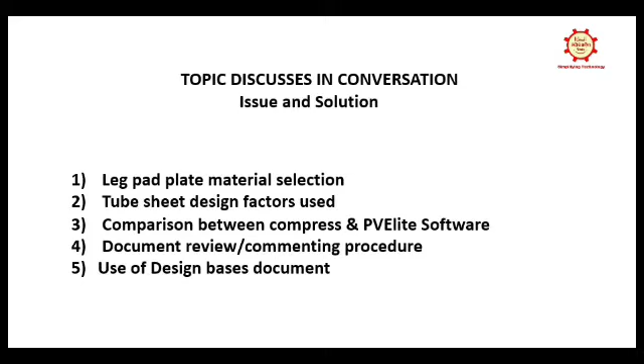Not particularly. Okay, you just came to maybe some other points in that one. You can join. Yeah, sure. I think last time you had some queries, no?

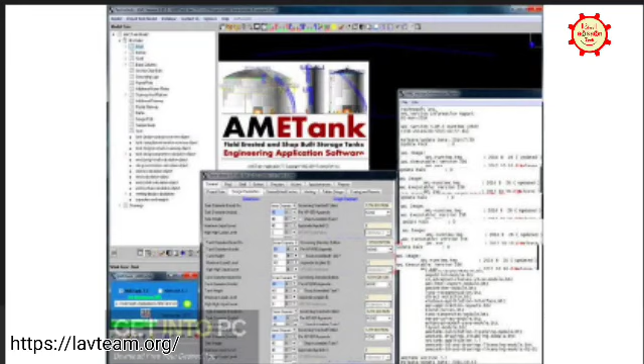Yesterday, one of the persons in the group asked about blast load. I think we were speaking about AMETank and a few other things. Actually, he asked something else yesterday, it's not blast load, they are asking about PVElite, some calculation where on the leg support.

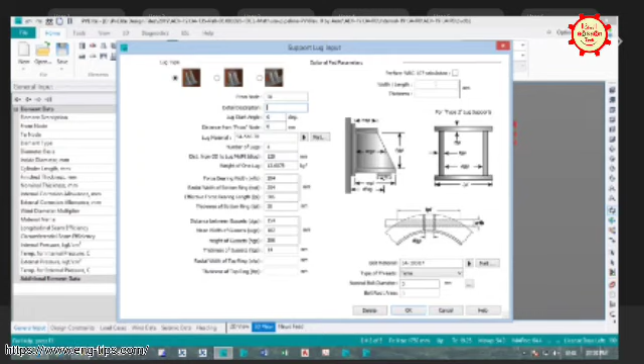I remember, material they want to specify, pad material, and that pad material there is no option in PVElite. So for that one they are asking how to address to AI inspector. So I just suggested to add one starting cover where you can specify what inputs are used, like material, and attach that with your report.

True, yeah, that will solve your issue. Did you face any such type, pad material different and vessel material different, like that? Any issues did you face? Yes.

Say in case of duplex, no need to have duplex pad. It is sufficient to have SS pads. We have done also, but it is up to the fabricator. Whatever seems less costly or more cost effective for them, we can do that way.

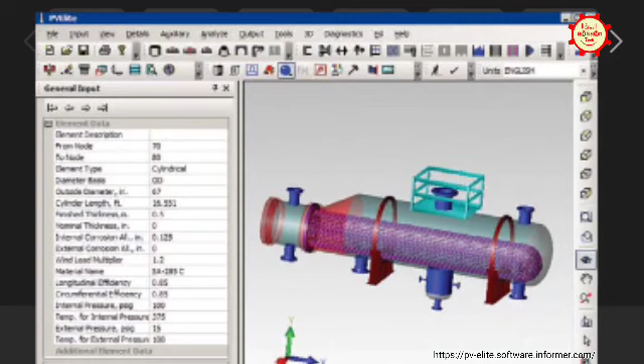But did you do this with PVElite software, any this? No, not really. Okay, so how did you submit your report to the AI inspector then? So the point is that it is not up to the AI to decide that.

See, it is not a code violation. If it is not a code violation or for the client, AI has nothing to say about it. That is my point. Yeah, it's not a code violation, also not for the client. If we are making any mistakes in that one, he should be fine with that.

But did you submit it just as I mentioned, as an attachment saying these are the inputs we used, like that, or something else, you did? Yes, you done similar way. Okay, only these kind of questions the third party inspector will ask.

Not even AI will ask such questions. Third party inspector only, when there is some specific code or instance, will they uncover much things in this one. Otherwise it will be clear whatever the material is, because to suit our requirement we can adjust that material.

Okay, Atul, do you have any view on this one? No, right now. Actually, we are discussing yesterday somebody asked about this pad material, different pad material used in the supporting of the leg and that.

It's not clear. Can you go a bit slower, what actually your query is? In tube sheet designing, there is an option for K value and maximum unsupported tube length.

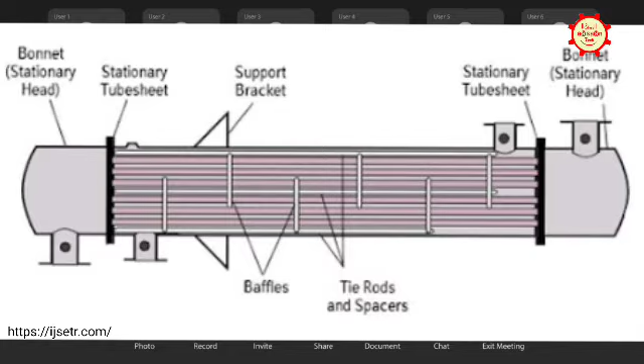Generally, we did not use it because we fill the above option. But in the K function, there are 3 factors for K: 0.6, 0.8 and 1. 0.6 is tube sheet to tube sheet distance, 0.8 is for tube sheet to baffle first support distance, and 1 is for baffle to baffle support distance.

So can we go with 0.6 tube sheet to tube sheet distance? If we use this, we did not follow, we did not enter tube sheet or any baffle dimension. That's why I'm asking.

Okay Vivek, do you want to answer? Yeah, I remember seeing this actually, but he's so fast I'm unable to recall.

But I can look for that white paper if you need, I have it in my system. You can check it for that.

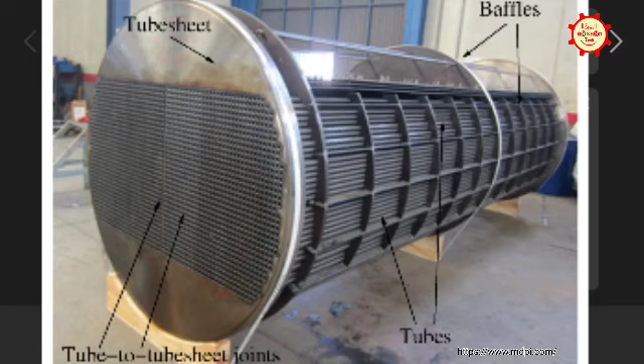Okay, I will add something here. In our case also, we used from tube sheet to baffle, not direct tube sheet to tube sheet, because if your heat exchanger contains baffles, then you have to use the distance between tube sheet to baffle. You have to enter that value and then it will be calculated correctly. Otherwise, if you directly use tube sheet to tube sheet distance, then the calculation will not be that correct.

What do you mean by tube sheet to tube sheet distance? I don't get it correctly.

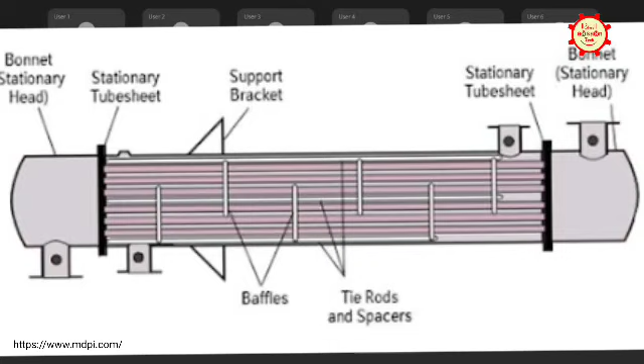In calculation, it will calculate stress ratio D2C and D2U. Yes, that is correct. If my... yeah, go ahead. My tube sheet is failing as tube, shell and channel stress summary D2U, UC and D2C. Or it can be possible.

It is connected to baffle spacing, unsupported tube length and number of tubes. So how can we deal with it if it is failing D2C and D2UC?

I'm a bit confused. Okay, you guys can... I have to think on that. Yeah. Can you repeat what actually it's?

It is a case under operating load case using the maximum minimum operating temperatures. Yes. Okay, so what are you suggesting on that? You want to reduce the unsupported tube length? That's what you are trying.

Yes. So what I was saying is that from the input standpoint of view, the only input that Compress typically asks you is where do you position your first baffle, and what is the baffle to baffle distance in case of a next one.

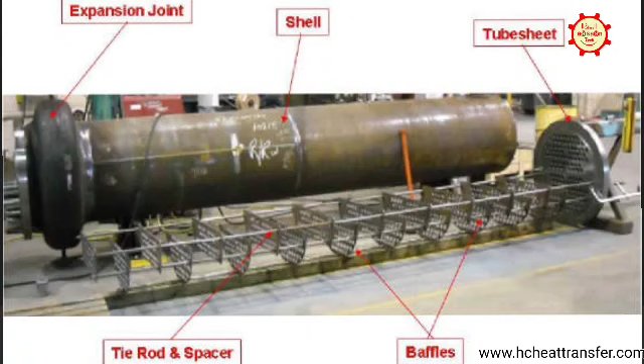Yeah, actually, I think he is linking this baffle to tube sheet distance along with the failure of this tube sheet, right Atul?

Yes sir. So in that case, the only thing that you can do is, for example, you have placed the first baffle as closest to the inlet nozzle, and the point is that it will take up till the next baffle in case of no tube window. The software will automatically do that. If you want to reduce that, you can make a support plate for the first baffle so that the entire length will be slightly reduced.

Okay, I think he lost the connection.

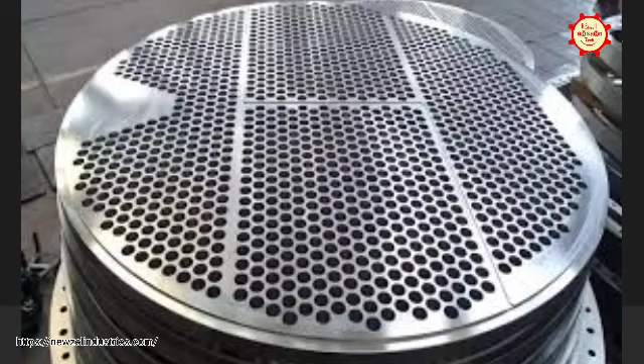In our case also, we done similar way, because we don't provide directly without baffles on that one. We also provide first tube sheet to first baffle distance, and then only it will take the correct values on that one.

Okay Atul, did you get the answer? So you have to specify from your tube sheet to first baffle distance, and then whatever factor is coming, plus if it's still failing, you can provide additional support. Like Vivek has told, additional support you can add, so that the hanging length will be reduced.

Atul, any other point you want to discuss? No, not right now. Okay Vivek, do you have anything more? I'm good.

Okay, you use Compress, not rather than PVElite, right? Yes, I have used only Compress. I never used PVElite. So how many years have you been using this Compress? More than 10 plus years now.

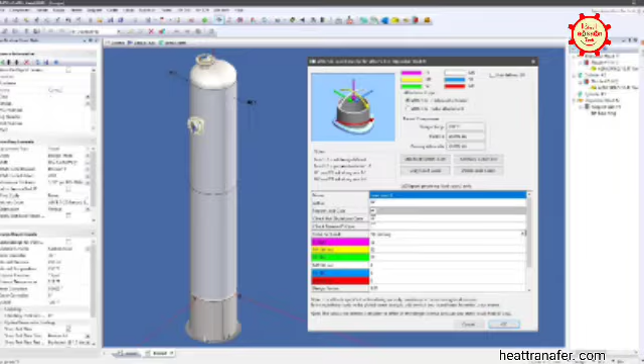Because this Compress has come before PVElite, or after PVElite? That part I'm not sure who came first, but mostly companies based in US prefer Compress. I think their marketing is better than that. But PVElite is more widely used than Compress, I would say. Yeah, but in US, mostly it is Compress what they are using.

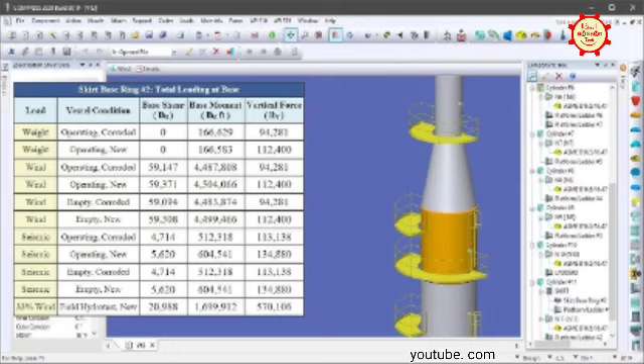Okay, so is it user friendly? Because PVElite, if you see, we feel that it's very friendly, the inputs or outputs, are you in that one? This is also very user friendly. I would say it is more user friendly than PVElite. But more popular is PVElite only, no?

Yes, only problem is that it only has two codes. It only has ASME Section 8, Division 1 and Division 2. You cannot do any other code. But PVElite provides you multiple options. That way, PVElite is, I would say, superior. It doesn't have any code, only ASME.

So it provides multiple codes in PVElite, but also the verification of the document, because when you run the complete calculation, you will get the results, the report along with the formulas they used, and the reports are far better than PVElite. Right now only PVElite has improved in terms of reporting, but Compress reports are far better than PVElite reports from long back. And the validity is also, they are best in the business.

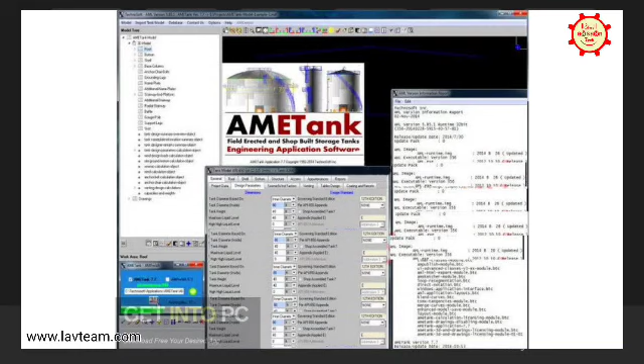This PVElite, Intergraph, they also sell some AMETank software also. They use some other... Yeah, we also have that AMETank, Seva was explaining earlier, which is also very good. That AMETank and that one.

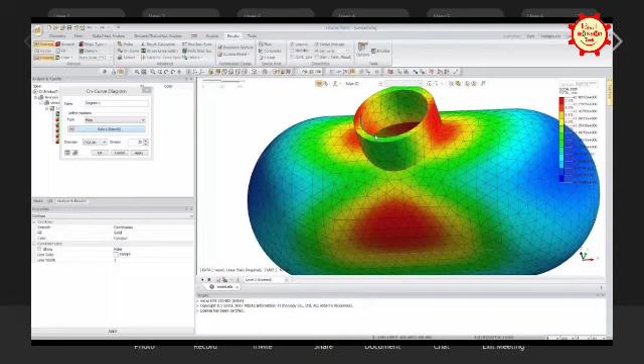Okay, so besides code, they also tie up with some Nozzle Pro software also, this PVElite, and they want that one also along with PVElite. Whenever your nozzles or something FE analysis needs to be done, they used to do it in between in PVElite itself, we can analyze that FE analysis on that one.

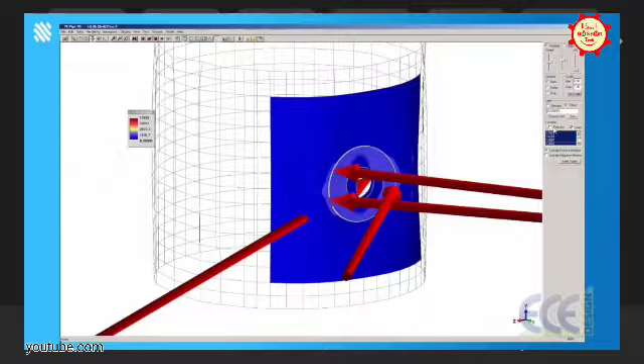Oh yeah, what about Compress? If I think the latest version doesn't have that option in Compress. That is why we always hold on to an older version, which has that option. But right now, I think they removed it. Compress used to do FE, but I think they sell it as a separate product now. I don't know, but there's an older version in my computer which can do that. Current versions cannot do inbuilt FE on nozzles.

Okay, this PVElite also, we have to purchase a separate one only, Nozzle Pro software, then this both software will work together like that. Right, in Compress also it's like that. Might be, they might have done it in the same way. Yeah, because the owner of that, Nozzle Pro owner is different, and PVElite owners are different, like that.

So you didn't review the way of their review of the document, whether they have some standard software or something like that. They will put that same comments repeated like that.

No, means if you get one document, like example, one GA drawing for one vessel, every time you will find that as per your experience you will review that one, or do you have some standard comments to put on that one? No, we will review.

It's not that there's no software for something there, right? Where multiple people can work on the same document. That is the software. So static equipment along with piping, civil, everybody can work on the same document live. So that option is there.